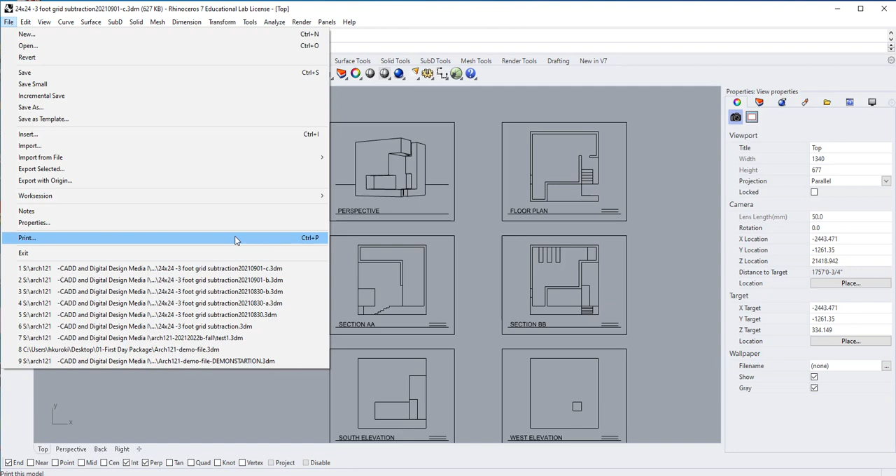In order to print, you'll type in the command print. I should activate this window first. So print, or it is in the file menu under print. Control P is a shortcut for that. But anyway, however way you get there, that's it.

First thing that's going to happen is you get to choose the printer. This right here is your whole screen, or a majority of what you have on the screen. When you hit print setup, that's what it's going to give you. If it doesn't, don't worry about it. First thing to do is to select the printer.

You could go to Adobe PDF, but Rhino PDF is its native software, so it's a safe thing to use when you're in Rhino. For size of the paper, you can select any one of these, but we are using a letter size paper, 11 by 8.5.

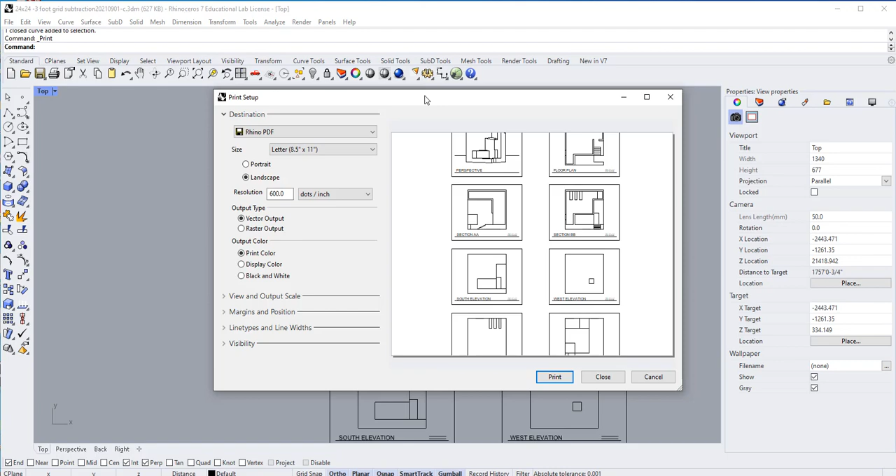It is in a portrait right now. I want it in a landscape setting because this is a landscape. The resolution 600, that's okay. Usually our printers only take about 300 dpi, if that, but there it goes.

Vector output, that's a line output, should be fine. If you do vector output, you should be able to manipulate it with other software after it comes out. Output color, it should be print color, but you could just print in black and white for now. If you want to keep it in print color, there shouldn't be any color in your drawing anyway, so it doesn't really matter.

That should be the first part of the setting. If I collapse this, you don't have to, but you're going to have to scroll down. Open up the view and output scale. We are printing the top view, this is what it says right here. I could choose any of the other views, but since my Make2D is looking straight down from the top, that's what I'm going to choose.

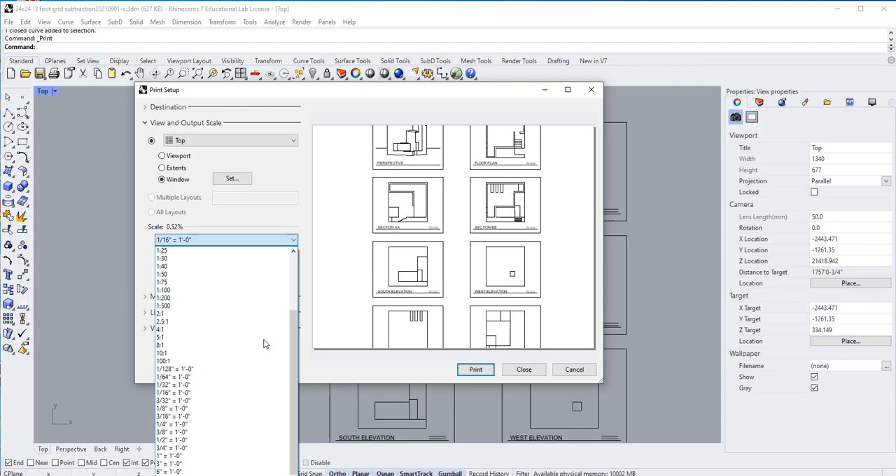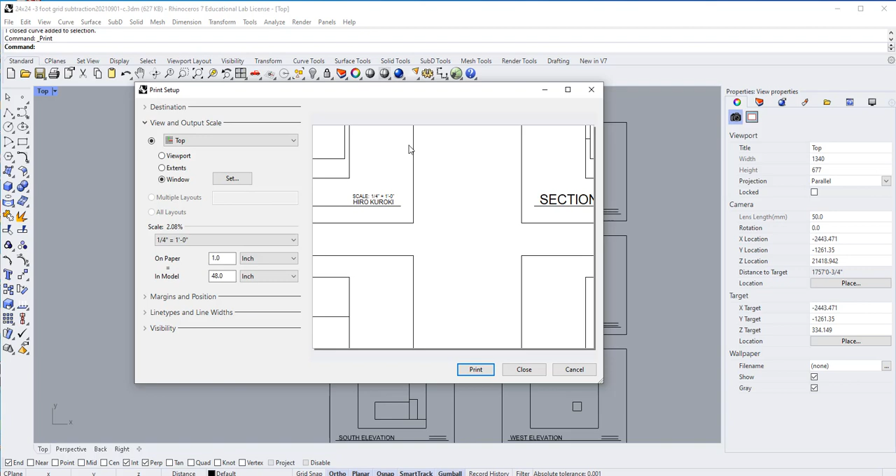And I set the window, and before I set the window, I am going to change the scale to 1/4 inch equals 1 foot. Notice that the scale factor here, 1 inch equals 48 inches, 4 feet... 1 inch equals 48. So that's the actual number, the scale factor we typed in to make the rectangle around our drawing. We'll come back to the scale factor a little bit later.

After we got that done, we could set, and it'll give me this right size. I can move this, place it right into the area right here, or try to put this thing in its place.

That should still be the same proportion because I drew the box at that paper size. But if you don't, let's escape for now. If I just set this thing, it'll give me that shape, so you can bring that whole printable area into your sheet. Hit enter, and this is the preview for the area that I'm printing. So that's kind of all set.

I could undo that, and then open up the margins and positions. I'm not going to set any margins. If I wanted to, I could set this side in, so if I have something in the edges that I don't want printed, like that box itself, I would set the margins in, but I'm not going to do that because I don't really need to. It's not going to print on our printer anyway, so why set it?

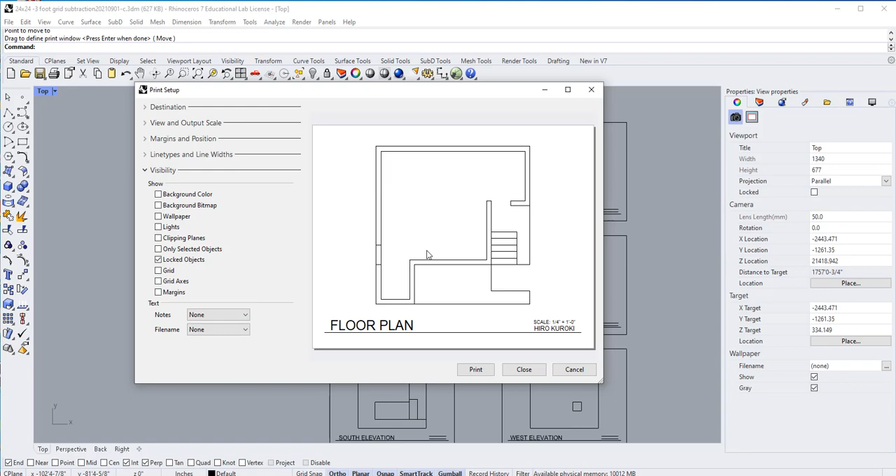Visibility, background, we don't need any of these. I think this is all fine. After it's all done, you should just say print, and another dialog box will pop up, giving you the whatchamacallit.

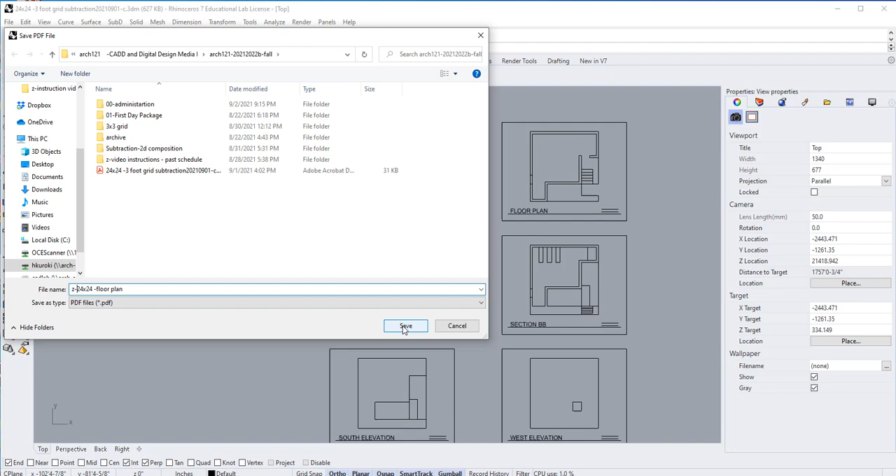I'm going to name this thing just so that I know what it is. I'll just say floor plan, and add a Z to it just so I'll be able to find it a little later. You don't have to do that, just name it whatever you like, but identify it as whatever the drawing is. And there we go.

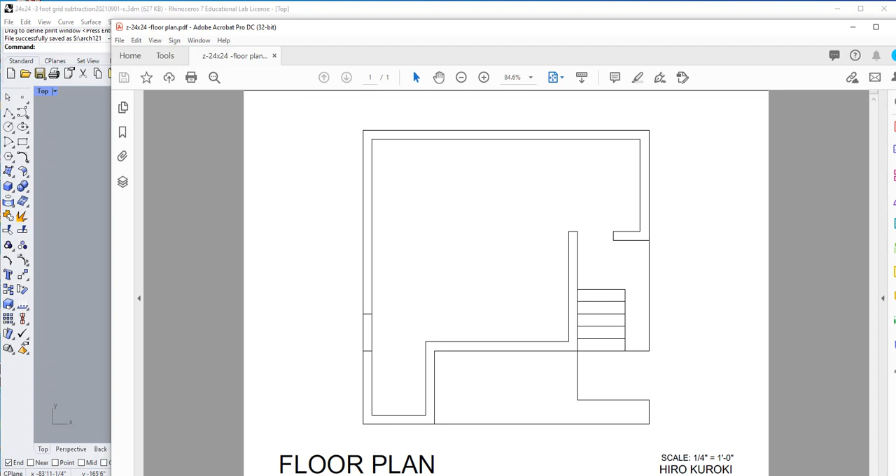Where I saved it was exactly the same place as this Rhino file, so it's right here in my server drive. If I open this up, it will be, well my default is set as, what is that called, Adobe Acrobat, and that's perfectly fine. It should look pretty much as it would on a piece of paper.